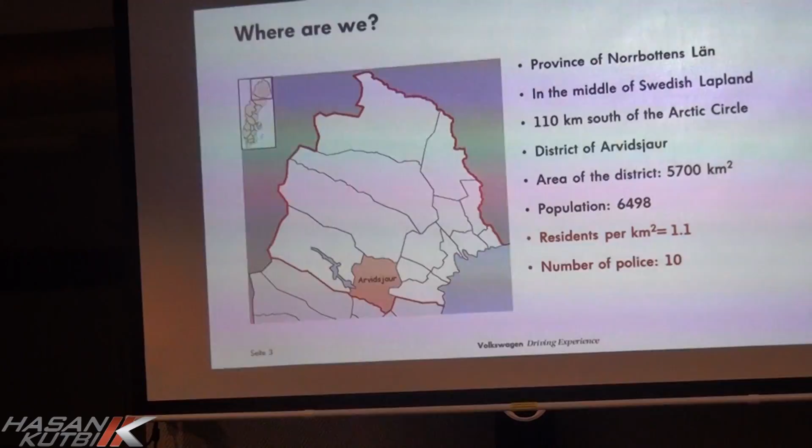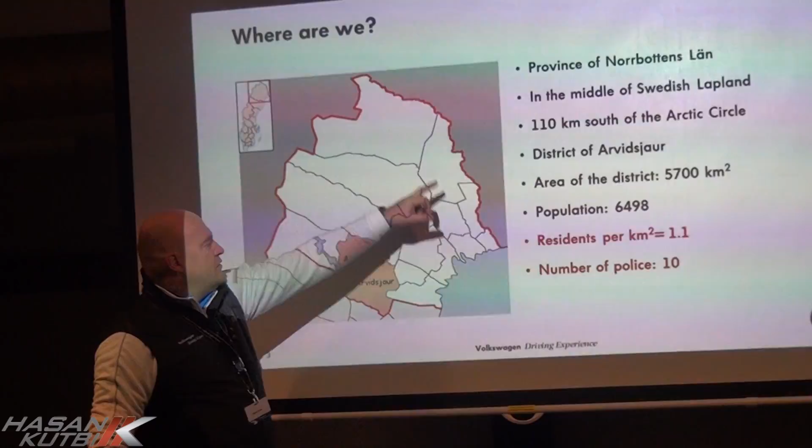Where are we? Right now we are in the province of Norrbottens Län. That's how the area is called. That's the whole region that you see here on the right. It's going from the coast at the east sea into the center of the country. Above this you have Norway. So we're quite high up in the north. We are in the middle of Swedish Lapland. And right now we are around 110 kilometers south of the Arctic Circle.

This is a district or commune. This is one community, one commune of Arvidsjaur, and the size of the commune is 5,700 square kilometers, which is one commune. I don't know how your places are. I know that Saudi Arabia is not that crowded like Europe is. You also don't have so many people in the country. But to give you a sample, this is the same size like the region I live in in Germany. And here we have 6,400 or almost 6,500 people living. In the same region in my part of the country it's 17 million.

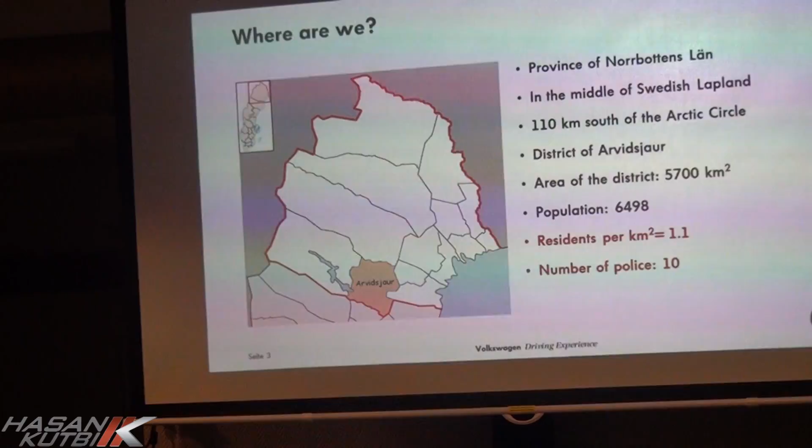Wow. Yeah, to give you a comparison of sizes, if you have been in Germany and you know about Cologne and Düsseldorf, which is in the west, this part has 17 million people. In the same size, 5,700, you have about 6,500 people living. And so you have a number of residents per square kilometer of 1.1. Wow. So if you get lost, don't expect there is anybody that you can ask for the way. You have to look for people that you can ask for the way. Also interesting, the number of policemen in this region is 10. So you can say you are lucky if you see one.

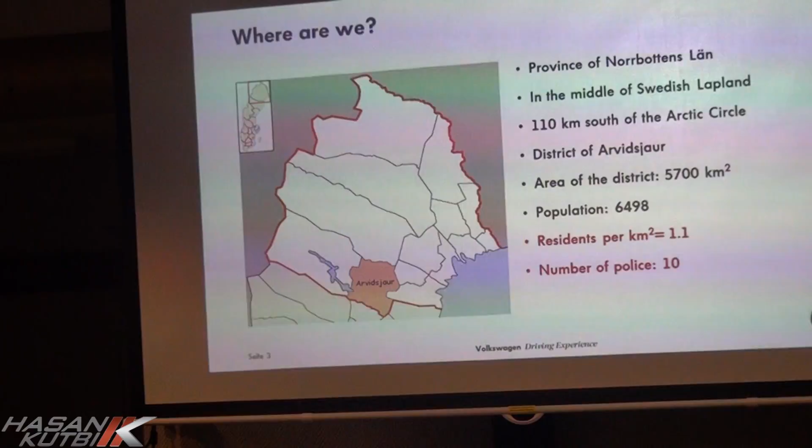Why are we here? Because here it's reliably cold. Right now it's quite warm. It's around -10, -15. The coldest temperature ever up here was -52.6. That was in 1966. The coldest temperature that we had in this place was last year, -35. And the coldest that we had in general up here was 4 years ago in Arjeplog, -45. And then you stay out for 10 minutes. First you don't feel that it's that cold because it's so dry. But the crazy thing is that when you start to feel it, it's already too late. Then you have frostbite in your face.

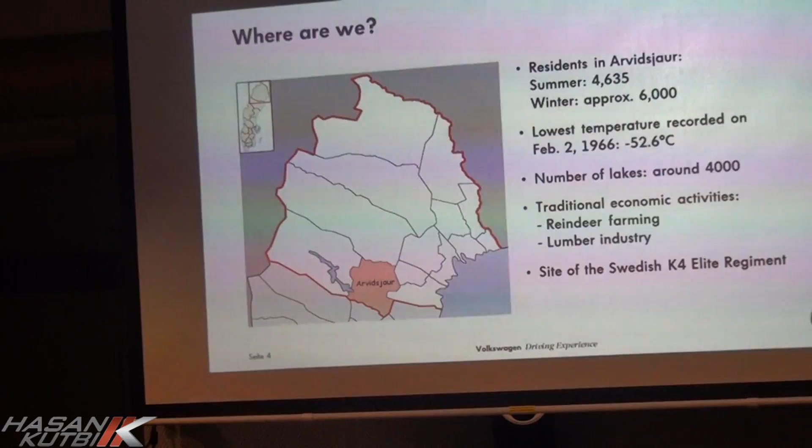We are going to drive on the lake of Arvidsjaur, which is the lake behind the whole city. We will offer you 2 circles with a diameter of around 100 meters. The speed that you will take while we drive inside in the end will be around 80 kilometers in a full drift. So you're really quick then.

We have handling courses in different layouts. As you can see on the right side, we have track 1. In the middle we have track 2, and then we have track 3, who all have a different characteristic. And when we combine them all together in the end on Sunday, you will have a track length above 7 kilometers, from start to the finish.

Today we will mainly use the dynamic area to make some basics with you, so that you get used to the surface, because the cars will react totally different. The dynamic area is about 500 meters long and 80 meters wide. So we have some space, if you lose control of the car, to react, so it's not getting dangerous in the beginning.

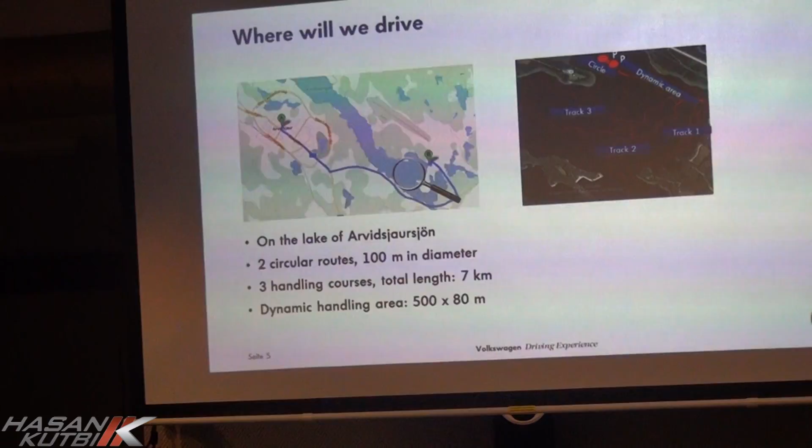So, what is the idea of the training? We would like to offer you unfamiliar driving surfaces. I promise you that is one. Even for us in Germany, this is extremely unfamiliar, because nobody has ice on these roads usually. You will get a certain sensitivity for vehicle reactions, and you need them because the vehicle is reacting quite interesting during the next days, because there is no friction.

You will experience physical driving limits, I promise you. That's the situation where Raphael comes in place. If you are above the limits, for sure he has some work to do, because then you will lose the track. And I promise you, you will have lots of fun just by working also on your driving abilities.

And we will use different types of cars. We'll use the Golfs for sure. But today you will also use a special car called Razor. And the Razor is a quad, where you sit inside. You can drive it with 2 people. It has a normal steering wheel, and we have a special Razor track.

The aim of this exercise is, before we start to go on the handling tracks, that you get a feeling to steer the car with the throttle. So we play around with these cars. You will get a certain gear for that. You get overalls and helmets and gloves so that you don't freeze and don't get wet, because it's like a convertible, so you're sitting outside. But I promise you that will be a very, very interesting story trying this with the Razors.

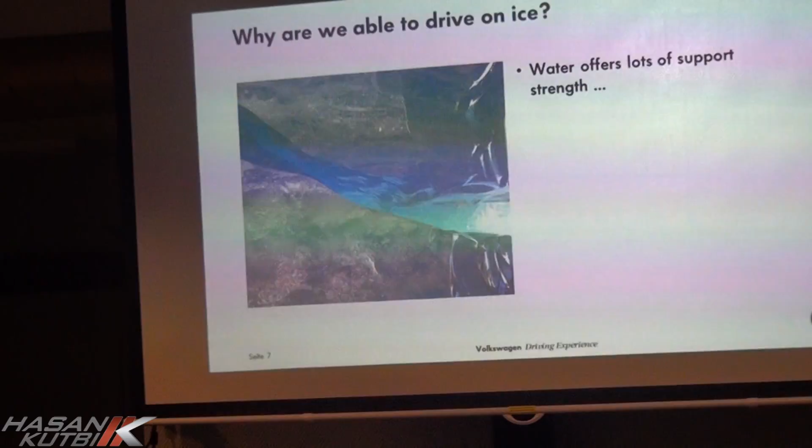Ice is water. Why can we drive on water? Water is offering supportive strength, believe it or not, if it is prepared in the right way. So it has to be treated properly.

The biggest problem is that in the beginning of the season, when it's getting colder, it starts snowing, and the snow is staying on the water. But the snow is like a blanket, it has an insulating effect. So when there is snow on the water, the ice cannot grow, because it's not getting colder.

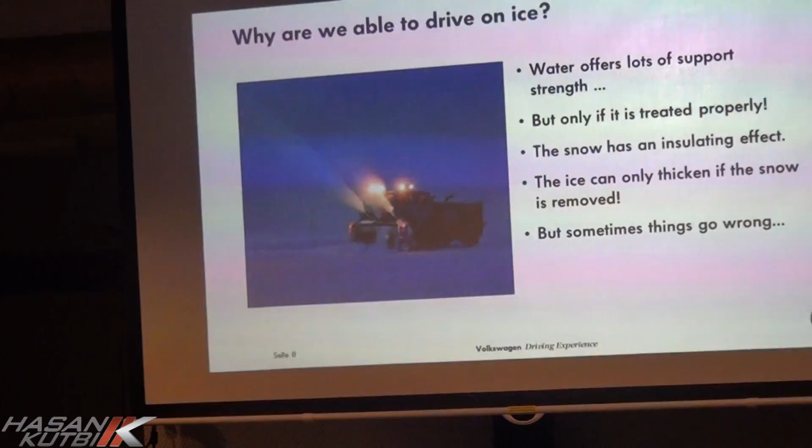So the ice can only thicken up if the snow is removed. Sometimes, while removing snow, things may go wrong. Then it is looking like this. So you can break through the ice when the ice is not thick enough. It can happen - that was on our lake 5 years ago, I think, almost. Yeah, it was in the first year.

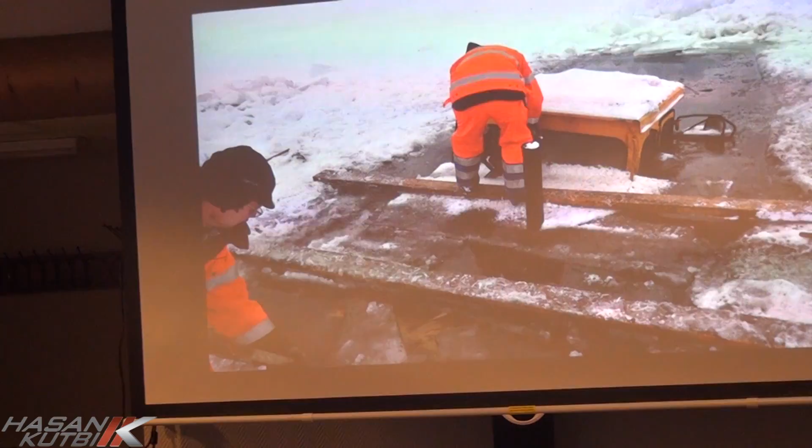The proper preparation of the ice is a very time-intensive science and work. We start to set up our tracks in December. I went up mid-December, then we mark all the tracks, do the line out, and go out with snowmobiles to remove and compress the snow. Then when the ice gets thicker, they start to remove the snow, push it out. From day to day the ice is growing and getting thicker.

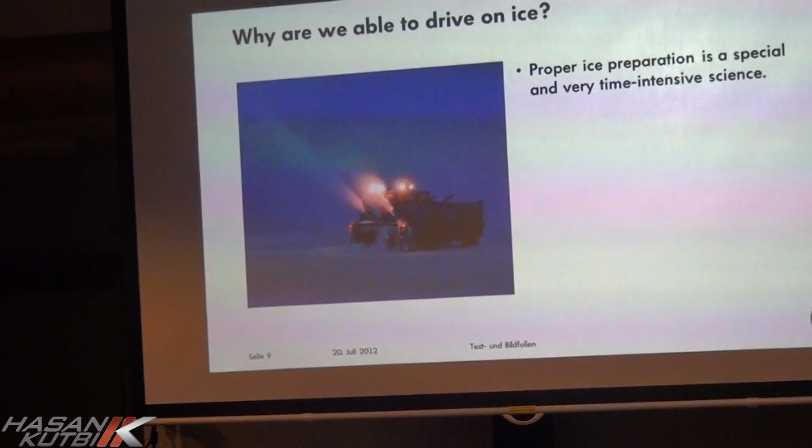So the question is, how much ice do we need to drive on the lake? No ice is carrying nothing. That's a famous summer sport up here, going with snowmobiles over the water. It's just a question of speed. If you're fast enough, you can cross the whole lake, but if you release the throttle, you will go down like a submarine.

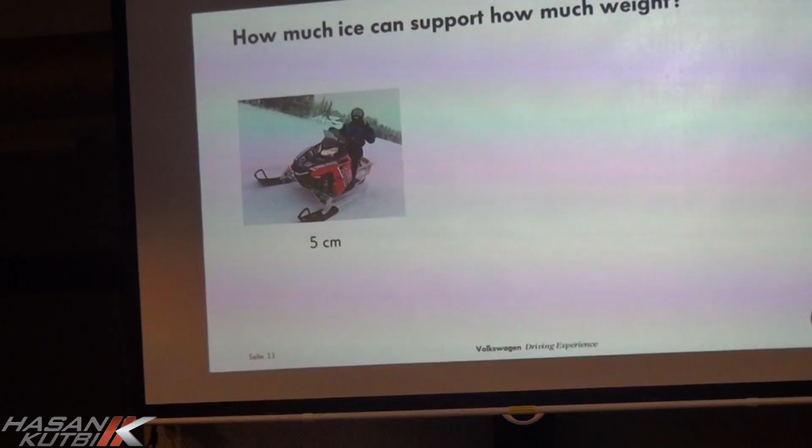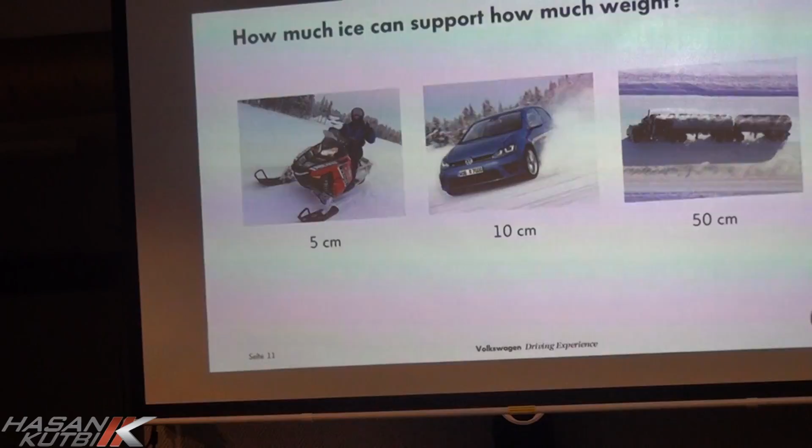If you have 5 centimeters of ice, you can go with a snowmobile, and 5 centimeters is done here very quick, it's not that much. If you have 10 centimeters, you can go with a car. If you have 50 centimeters, you can go up to a 40-ton truck. And when you have above 80 centimeters, you can land a plane on it. Right now we have an average of 50 centimeters in our lake, and some parts we have even more.

The ice at the corners goes down to the ground, so we don't have to be scared that you will go down into the water.

What happens sometimes in spring, for example in March, is that during the day it gets warmer and the top surface starts to melt, then during the night it freezes again. But because it's not cold enough at night, not all the water that melted during the day freezes, only the top. Then we get so-called double ice.

So we have ice, water in between, and then the carrying ice below, which is quite scary for many people because you drive and then the car breaks in. You step out, you're standing in the water, and you think you'll go down, but there's still ice below. We drilled a hole on Monday, and my arm was in there from here to there, and there was still no water coming up. So this was just the size of the wall of ice that we have on the lake. You can be sure there is enough surface for you to go out on.

When we drive on the roads, you've seen the reindeer yesterday already. There are three things you have to take care about. First of all, we always drive with lights on up here. Our cars are set up the right way so you don't have to worry about this, but everybody drives day and night with lights on.

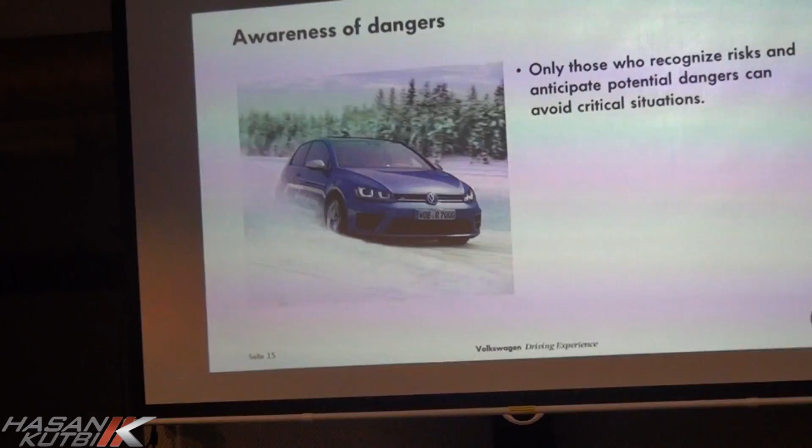Before we start driving, we should talk a little about driving physics, which is quite important for what we're doing during the next days. First of all, driving has something to do with anticipation and experience. Only those who recognize risks, who understand there is a risk, can avoid them. And there are always the same three safety maneuvers that you're going to do.

So when things get critical, what do you do? What is your reaction when things get tight while you drive? Do you accelerate? Common consensus is slam on the brakes, right?

Right. Braking is always the first reaction we should do. When it's getting tight, press the brake. The second is evasion, avoiding, starting to steer to react. And the third is a combination of both, braking and steering at the same time. So that's the three points you always should have in mind. It's always bad when you say, this will not work, and then put everything away. Try to work on the car until the end, even when it's getting critical.

85% of the information that you need for driving is visual information. So to be honest, you are not driving the car with your hands, you are driving the car with your eyes. Can we drive when we are not able to hear? Sure. But can you drive when you can't see? No, impossible. So visual information, 85%, is the main key for driving.

And I promise you, during the next days, if you look to the wall, you will catch it. The wall is not jumping on the road, but your eyes follow the wall, so you will hit the wall. So always keep your eyes viewed to the distance where you would like to go to, and stay concentrated on the road. If you look at the point which is critical, this is always the same: the eyes get bigger. Oh, there's a huge wall, and it would be so easy. Just look 3 meters next to the wall, then you will go there. But if you keep your eyes on the wall, you will hit it for sure.

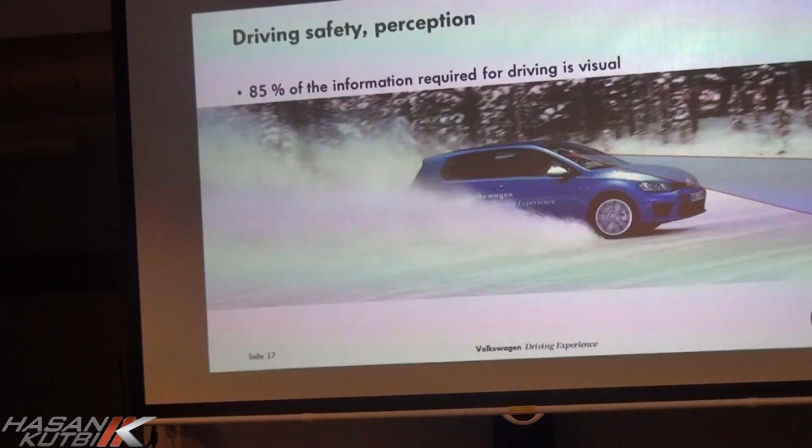I have a little experiment for you to explain how difficult it is to be focused with your view. I have a remote control here. You see the yellow LED on the back, and when I press it now, there will be a number coming up. So be concentrated on this yellow spot, and tell me the number you have seen. Everybody focused? 3, 2, 1. Which number was it? No number? I mean, it's crazy.

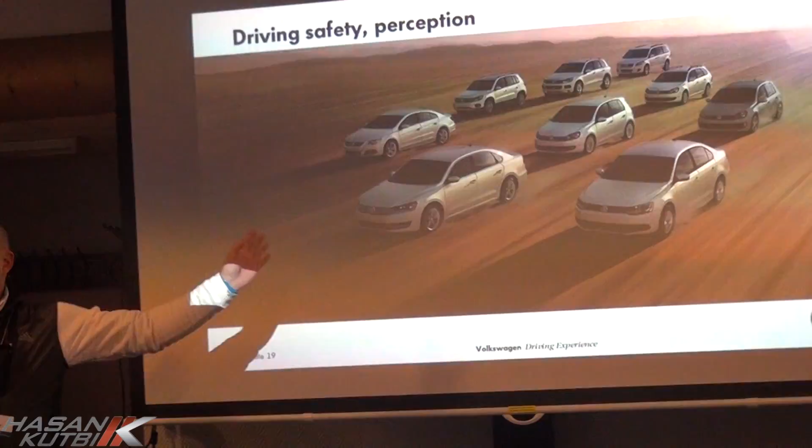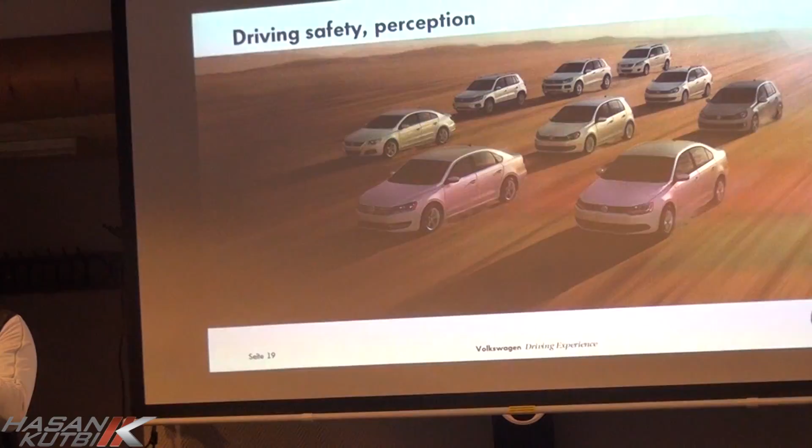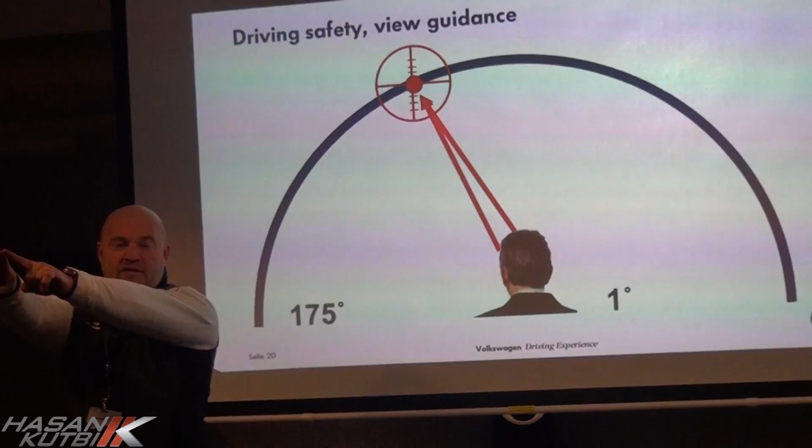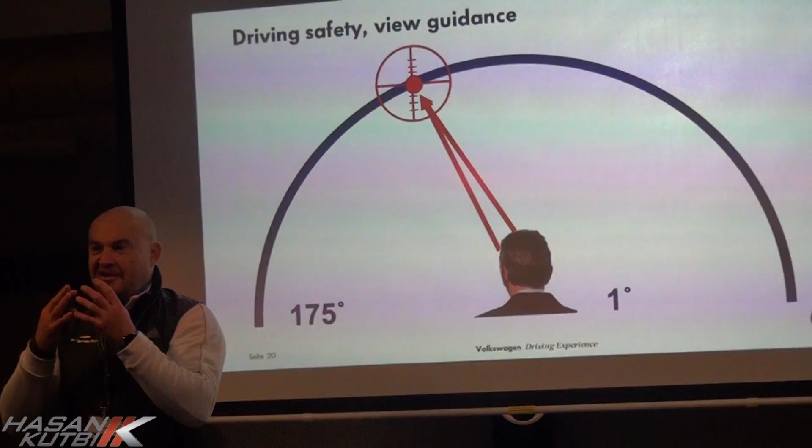So if you are not focused on the view, the point where you really want to go to, you will not catch it. View guidance is extremely important. We as humans have a so-called peripheral view of 175 degrees. I can see, when my view is straight to the front, that something is happening here, that my fingers are moving. But when I have them in front of my face and I concentrate and focus on my fingertips, keeping my focus here, and just move my fingers for 1 centimeter, it starts to get unsharp, because we cannot focus on that point. So if you are not focused on the point where you would like to go to, you will be lost.

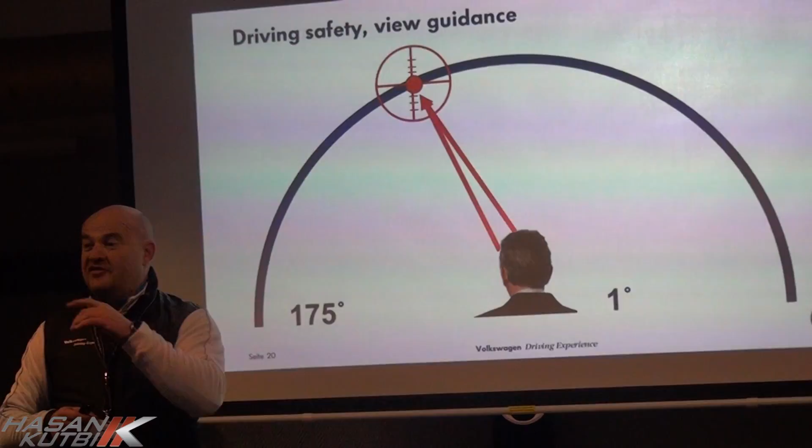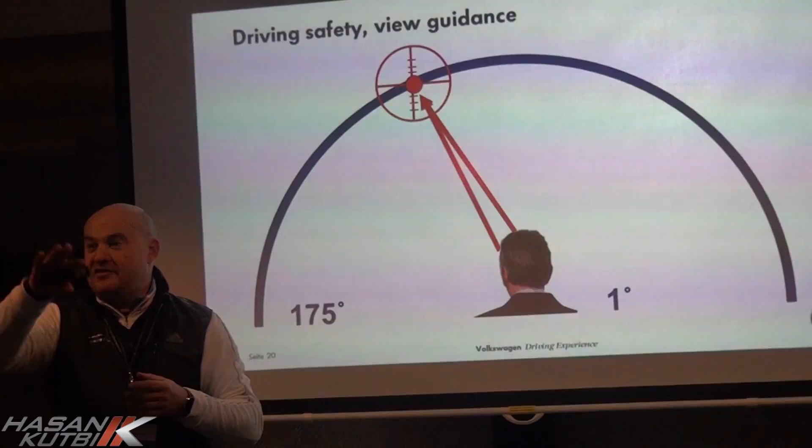So 85% of the information is visual information, which needs to be controlled in the right way. That's the first and most important point for all this. With 7 kilometers of track that we're going to drive on Sunday, you will never recognize the whole track, so you need to look where the track is going to. And when it's light out like this today, everything is white, so there's not so much contrast. It's not like a normal road where you have a black band going around that you can follow. So view guidance is really, really important for us.

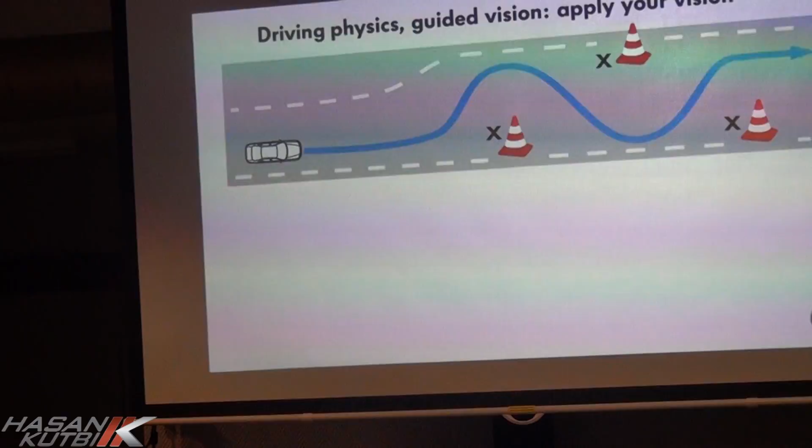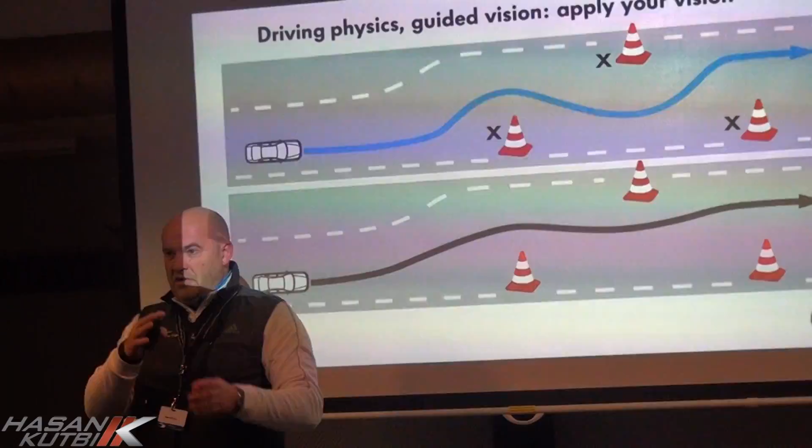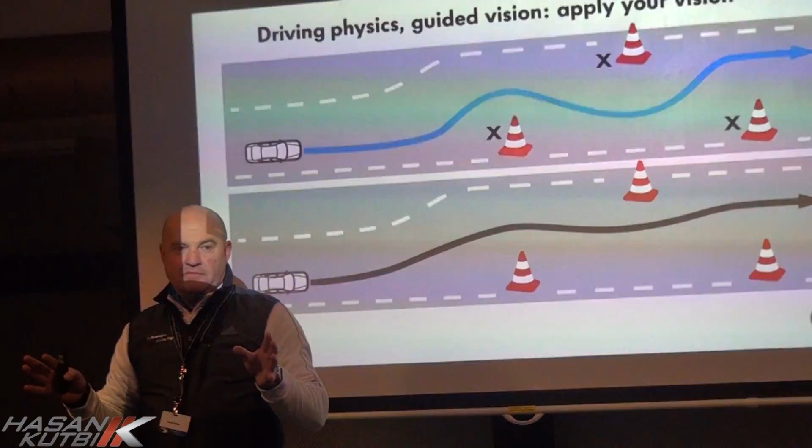And yeah, this is the main aim also of the exercises that we do. When we drive a slalom, if you look to the cone, I promise you, you will hit the cone. The idea is to look in the gap in between and to look straight ahead, because you will not hit the cone if you don't look at it. But if you go with your view from gap to gap to gap, then you always will stay in the gap. If you look on the cone, I promise you, you will hit it. That's why view guidance is so important.

And as I said, driving of cars is playing with forces. And we will play with the forces quite hard during the next days, in a very unusual way. So there's many forces influencing your car. What forces do we play with? Gravity. Friction. Steering. Natural forces. And what is the most important one when we want to go forward or want to brake?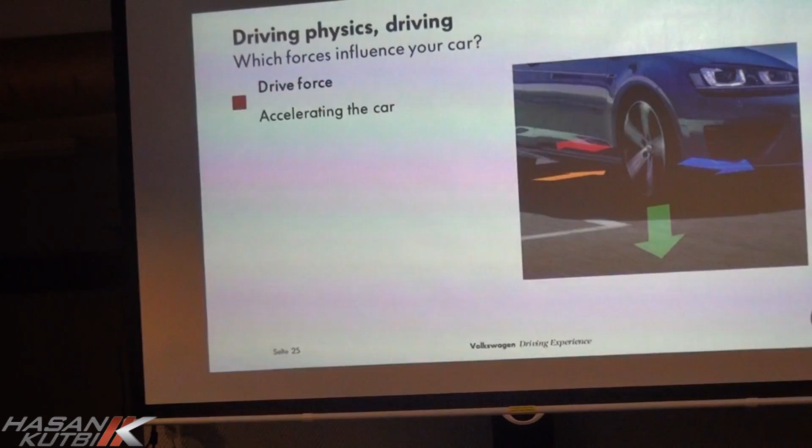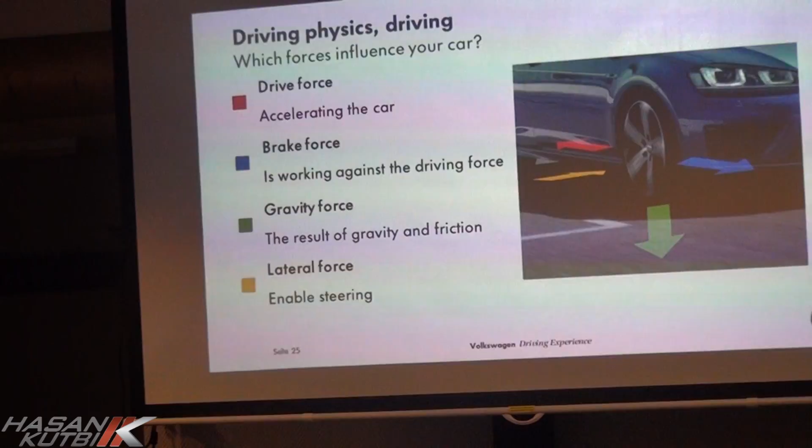Acceleration and deceleration. So we have acceleration force, we have braking force, we have the gravity force, and we have the lateral force. Gravity force, there some people have more advantage than others. It's always depending on your own shape. If you have more weight on the car, for sure you have more friction at the same time. But the bad thing is that you need to accelerate all these forces that you bring into the car. That's the disadvantage of it. So it's always a mix of both.

And now we have to speak about how much force can be transmitted. If you drive a car on a road, you have a limit of friction, a limit of adhesion. And this limit is always related to the surface. So when I accelerate, going forward, I can push the throttle quite hard when I'm on dry tarmac, because then there is high friction, so I can go quite hard forward.

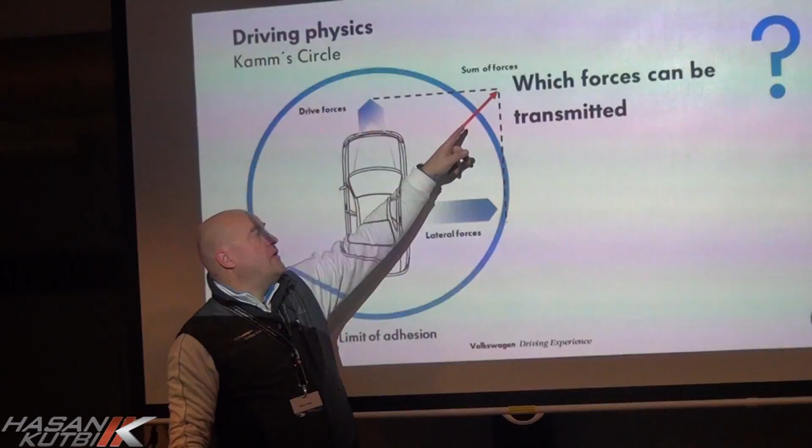The sad story is, if I do two things at the same time, accelerating and steering, then I have two forces that come in play: acceleration force and the lateral force, because I start to steer. And these two forces always produce a so-called sum of forces. So both forces have to be seen together. When I'm accelerating hard and I start to steer at the same time, these two forces get added and build a maximum which goes up to the limit. And if you accelerate too hard, or if you steer too much, you're above the limit of what the tire can transmit to the ground.

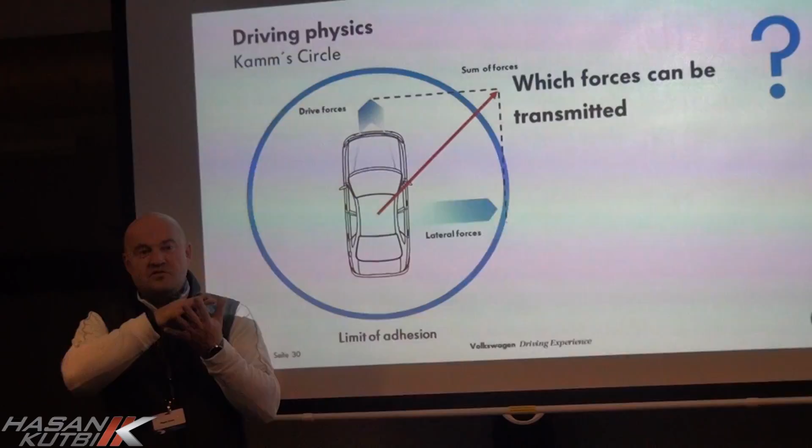And then you're at the point where we try to go to, to bring the car in a certain instability, but in a controlled way. So we play with these forces. We are always playing around this corner, to bring the car in these unstable movements, but in a controllable way. On dry roads, when you're above the forces and you have a slip of friction, then the reaction is even worse. Okay. A question, please.

On asphalt, on dry summer days, usually the tires get stickier to the ground whenever you build up the heat, up to a certain limit. Now, here, I know there are snow tires, and sometimes they use chains, and sometimes spikes or studded tires. Are we going to use anything like this, or just plain snow tires? No, we have spikes. These cars have 400 1.5 millimeter spikes inside.

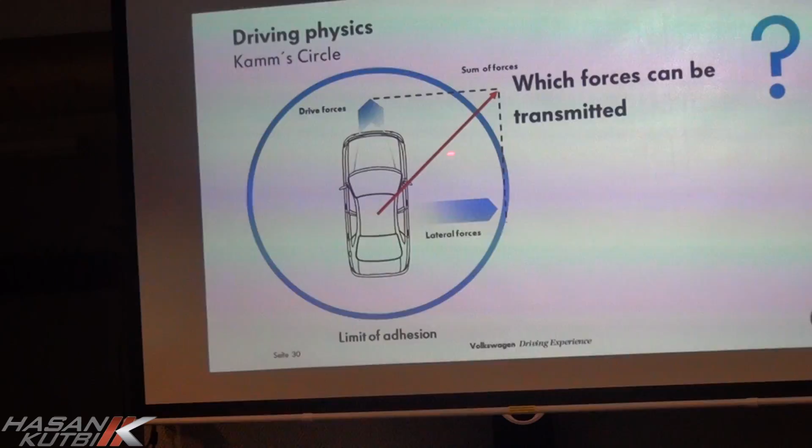If you would use normal winter tires, you would not be able to drive on ice. The car would accelerate in a certain time, especially when you have a 4Motion car, but the problem is you have no steering at all. You would just go straight if you start to steer, because then we are exactly at this point: the circle on ice would be small like this, and not like that, because the grip limit is extremely low, which will be also a problem for you personally.

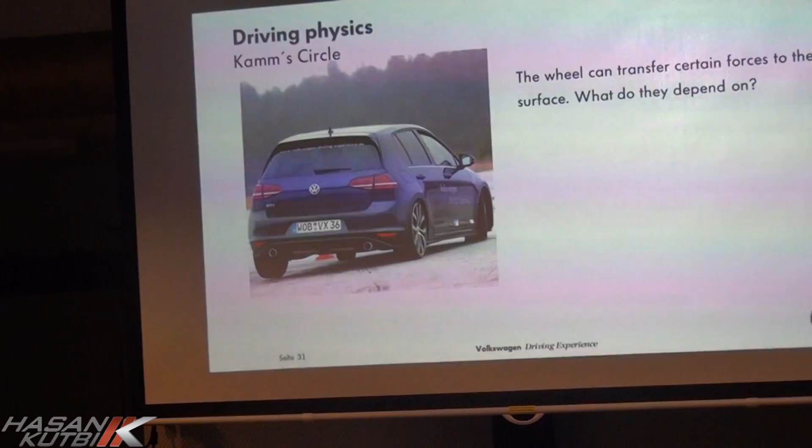We'll come to this later, but really take care when you leave the car. When you open the door, put your feet out. We had many people leaving the car like this, going longer and longer because one foot was already slipping all the way. We have no chance to put salt on the ice. So the wheel can transfer certain forces. The question now is, what do these forces depend on?

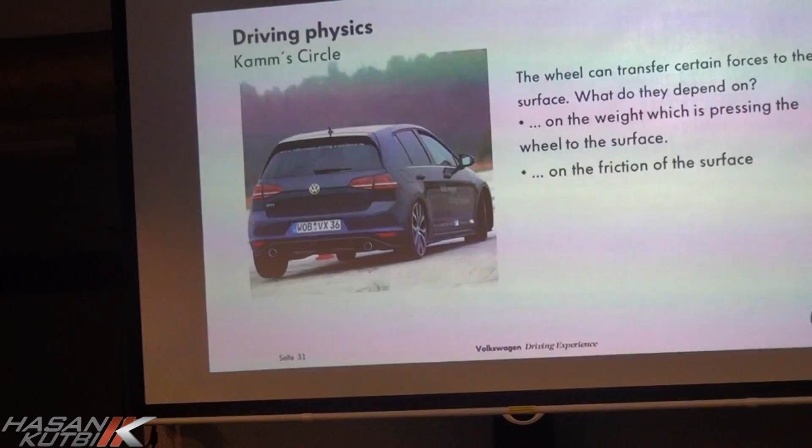It's the weight we already spoke about that you push onto the ground, and it's the friction of the surface. And this surface has no friction at all. So, in the end, we start to work with these forces, and we start to work with the weight, the weight that you put on the ground. And when you drive a car and you accelerate, you use the forces and you change forces. When you accelerate, you have a weight shifting.

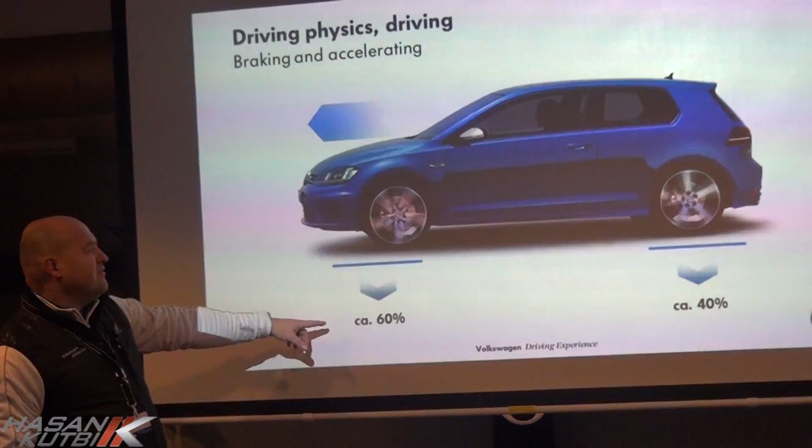So that's a standing car, sorry. Yes, standing car, because the car is already moving to the back. So standing car you have usually 60-40. When you start to accelerate, the car is moving backwards, so you change load to the rear. Then you have 65 in the rear and only 35 in the front. Remember the picture with the circle.

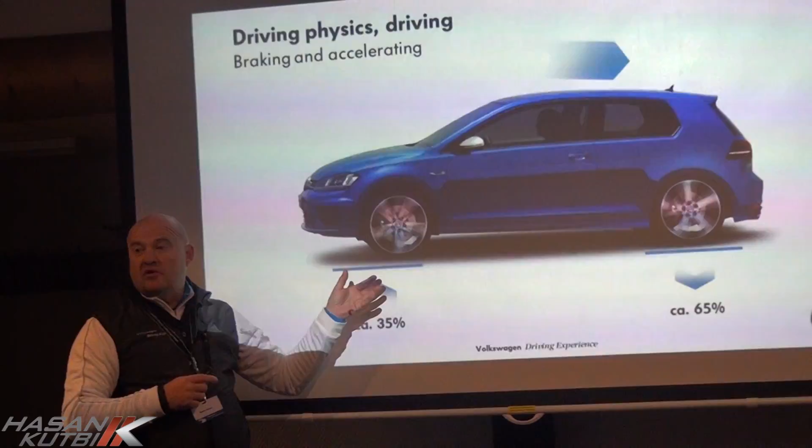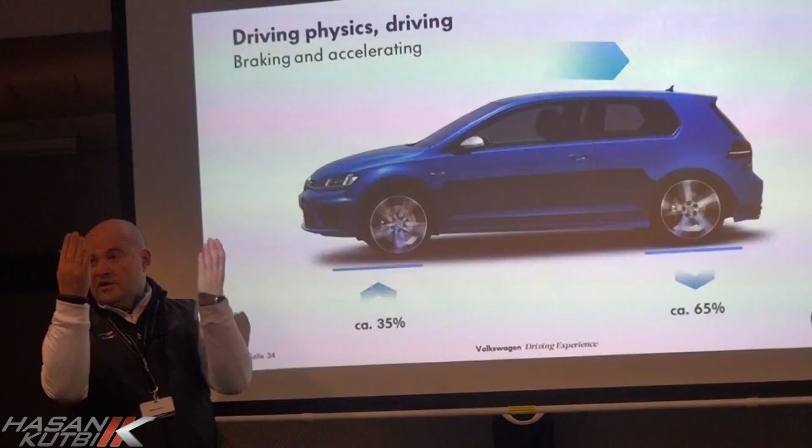When I now start to steer at the same time, the tire has less pressure on the ground because the weight is going to the back, so you have less forces that you can put in the steering. You have more force that you can put in acceleration, but less in steering because the front axle is unloaded. If you brake, the relation changes completely. When you start braking, the force is going to the front. You have more pressure on the front tires, so it's easier to put pressure on the steering, because the tire is already pressed to the ground.

And this play of load change is something very important for the next days. We will play with the load change already today to give you a feeling of how can I easily change or turn the car just by load shifting, moving load from front to the rear. So we play with these load changes a lot.

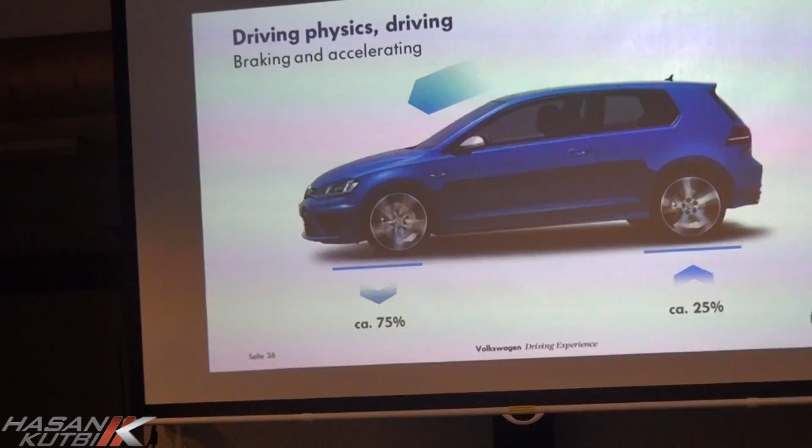Before we start, one last point. First of all, please follow the instructions that Ronnie and Benny will give you when we are out at the ice. If we give you speed limitations, they have a reason. When they tell you this exercise works with 50, I promise you it will not work with 100. There's an idea behind it. Right now we are only one group, so it's easy to stay with that. Tomorrow when we are two, both groups will run the same program, just with a day difference. And Sunday we will run the program together.

If you see any lamps flashing up in the car, I promise you, you will definitely see the tire pressure monitor coming up. That has to come up, because when you drive on the ice and you get contact with the snow and the snow walls, you get snow in the rims. And this snow is freezing, and so you have an unbalanced tire. The ABS sensor detects that the tire is unbalanced, which is an indication for less pressure, and that's why the yellow lamp will come up.

Just let us know when it's there, then we check if there is a puncture, which usually is not, and then we keep it like it is. Because if we set the tire pressure new every time, you get new snow inside and you will get the lamp again. So then just ignore it. We cannot take it off at this point. As I told you, when you leave the car, make sure that you have a safe stand, because if not, you really will fly off your car.

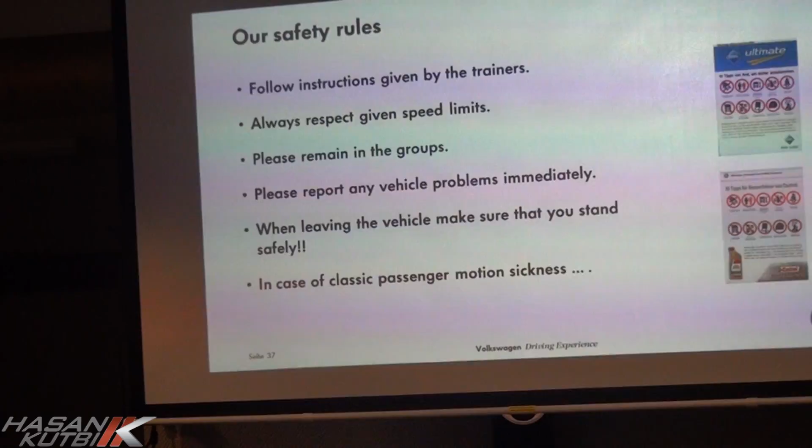You will be in the car with two people, and there is the famous co-driver sickness, because we will not go straight, we will have a lot of movement in the car. If you feel not that good on the co-driver side, don't wait until it's getting too strange, and promise me, the glove box is not big enough. So just open the door, get out, and try to catch some fresh air, so that we have no accidents inside the car from co-driver sickness. All right. Any questions so far from your side?

Good. Then I would say, hasta la vista. Take all your stuff, take whatever you like. If you would like to take some drinks, we have drinks outside too in our tipi. And Ronnie and Julia already prepared the cars outside.